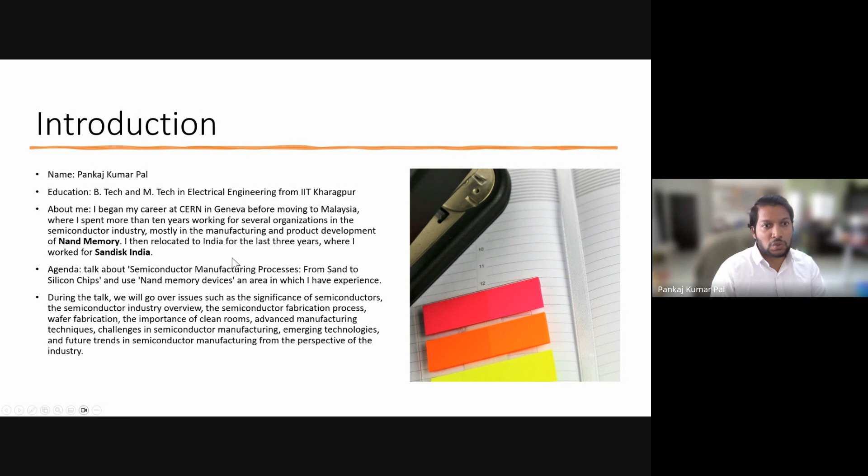Today's agenda will be to talk about semiconductor manufacturing processes, starting from the sand till we reach the product that is sold outside to the customers.

First we'll talk about market size, how it's growing, and who are the key players. As we all know, the number one market player in this field is TSMC. TSMC is a company that does the foundry job only, meaning it does fabrication only for others.

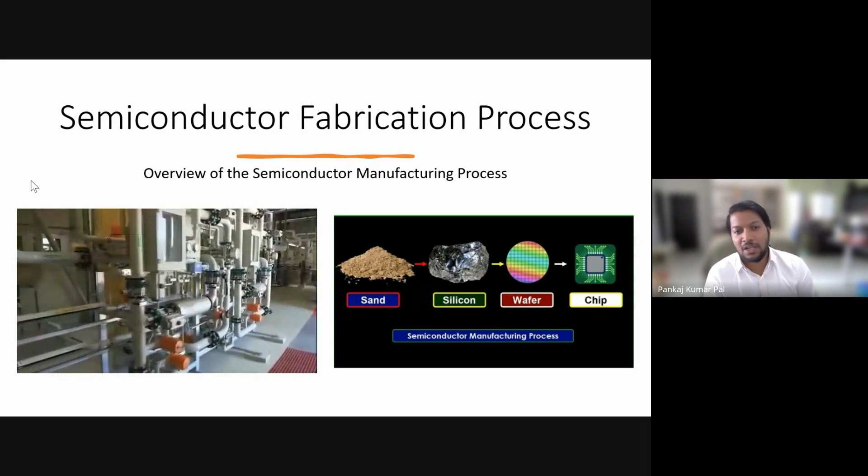So this is what we have, this is our raw material right now you see. And this raw material is everywhere, right? Like you can find sand everywhere. Sand is pretty much in every country or any place, you can find it easily. Then to build it to this chip level, it goes through complex factories and foundries where we take the sand and then convert it to these chunks of silicon you are seeing right now. So this will be building from it, and then we will heat it like in a furnace and have a crystal ingot, and then this kind of cylindrical metal that you are seeing, that is pure silicon which has to be chopped into wafers later on, and from there onwards we will make these chips.

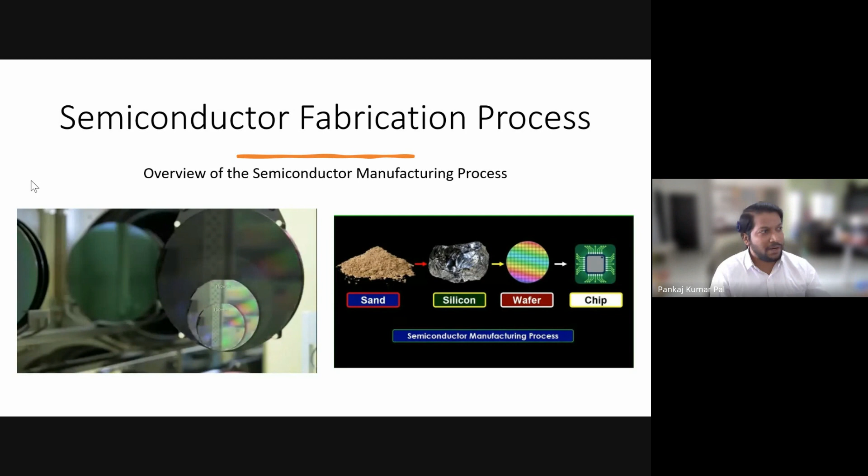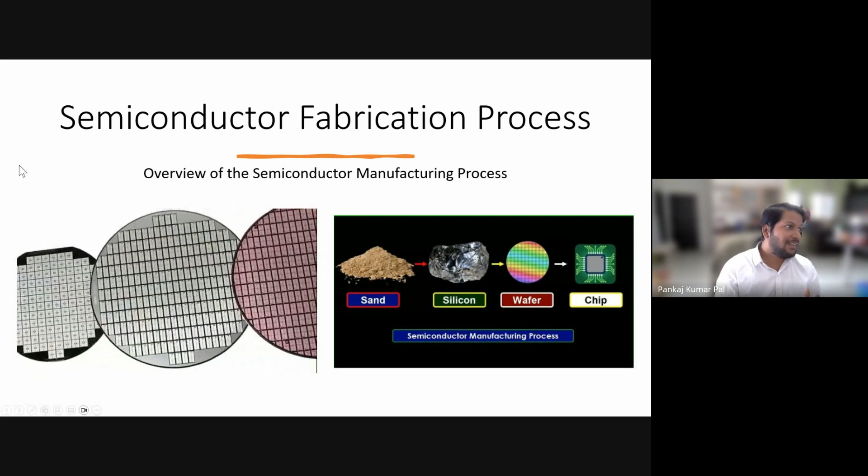So this video in short will show you all. 100 mm, 150 mm, 200 mm and 300 mm, these have been the sizes of these wafers normally used in the industry. And then within this we write the circuit in, and then this becomes small chips, what you see inside like a wafer. And within this there have been many, and now this video likes to show you how we chop this into wafers, basically these slices. So this is a basic understanding of the whole fabrication process.

But from here you can see how we make something from sand until not the chip but the wafer right now. But from here onwards we need to write circuit on it, and then we have to chop it and test it again and then make chips out of it. So we will go to the next slide.

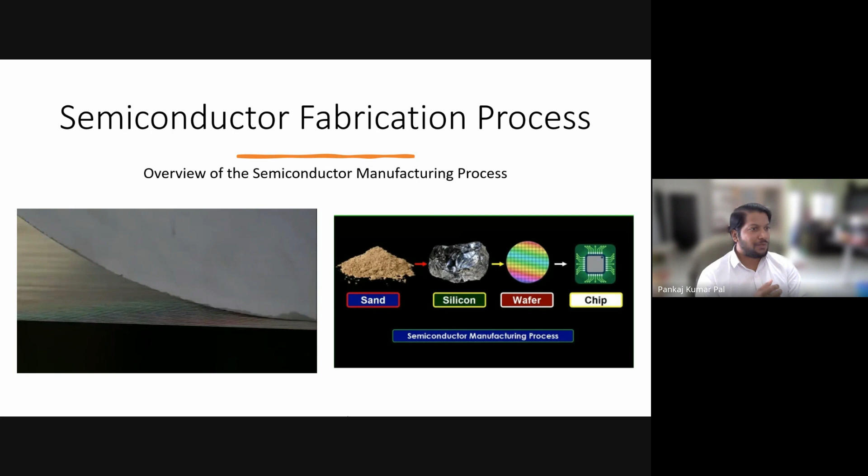Thanks to SK Siltron, because I got this video from there. So wafer fabrication needs basically sand, and then we have to do the crystal growth, and we have to cut the wafers in, right? So this process is pretty complex.

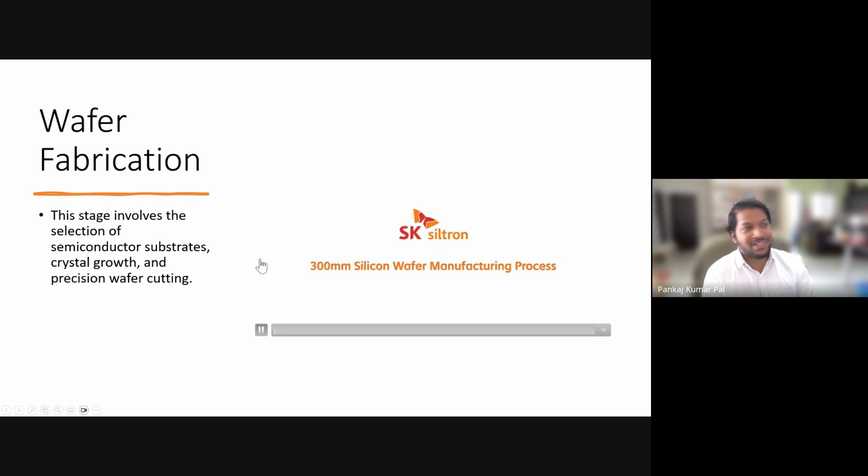It is not as easy as it seems. Let me play this video and everybody should watch it, please.

Polysilicon stacking is a process of filling polycrystalline silicon, the raw material for silicon wafers for semiconductors, into a quartz crucible.

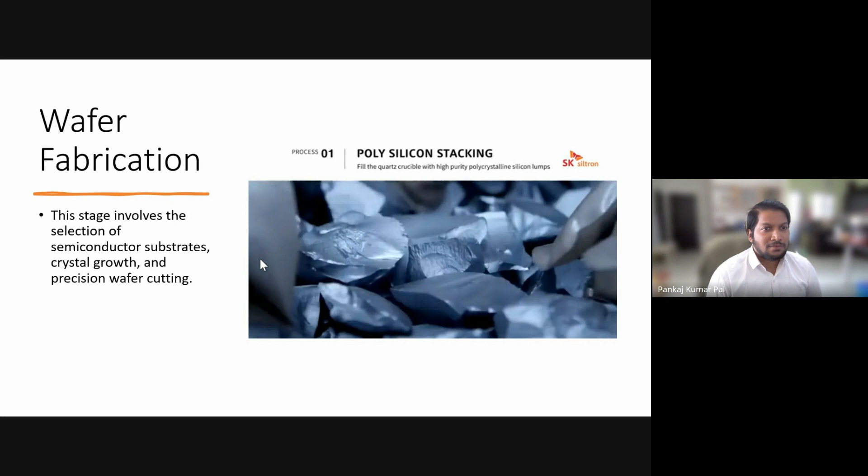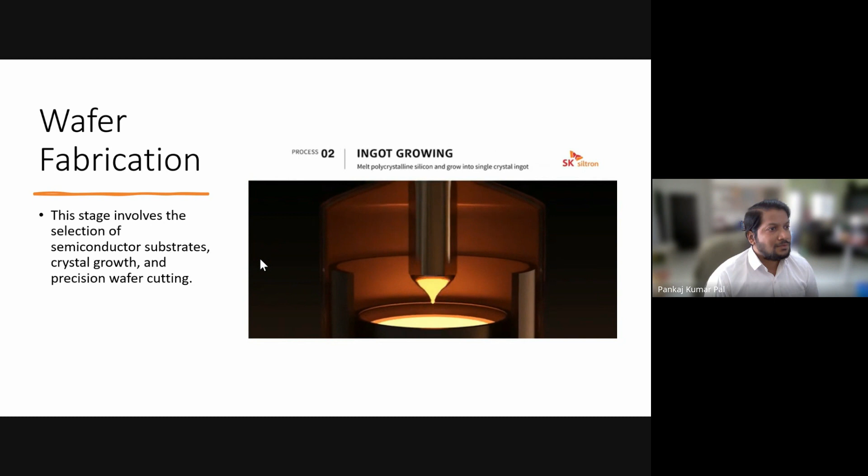Ingot growing is a process of transforming polycrystalline silicon into monocrystalline silicon, melting polycrystalline silicon into a liquid, and precisely controlling the thermal environment, growing it into a high-quality single crystal ingot.

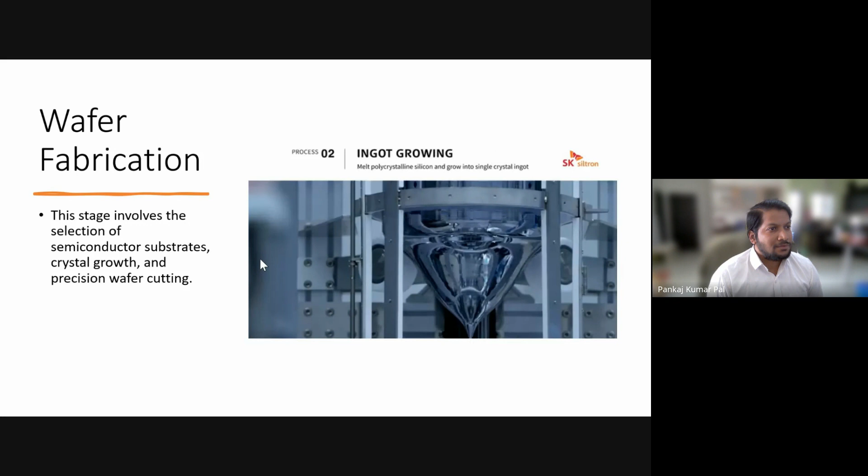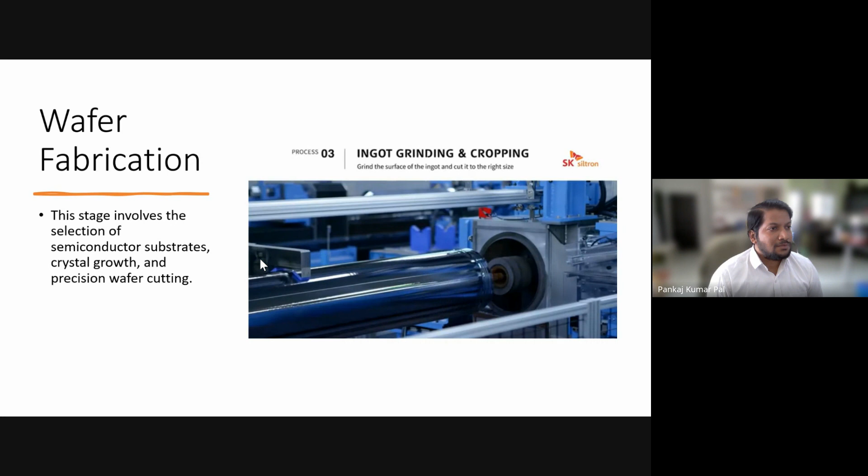Ingot grinding and ingot cropping are processes in which the ingot surface is trimmed and then cut into blocks to accommodate subsequent machining.

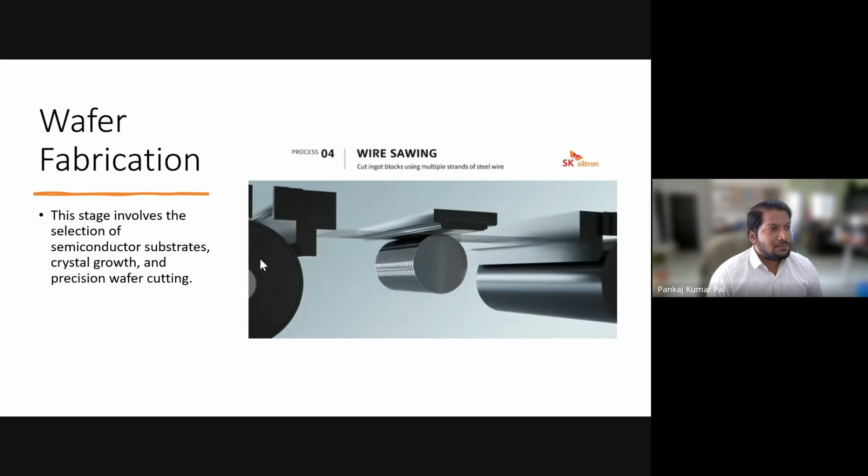Wire sawing is a process that turns ingot blocks into multiple sheets of wafer by vibrating thin steel wires at a high speed to cut the ingots in thin slices.

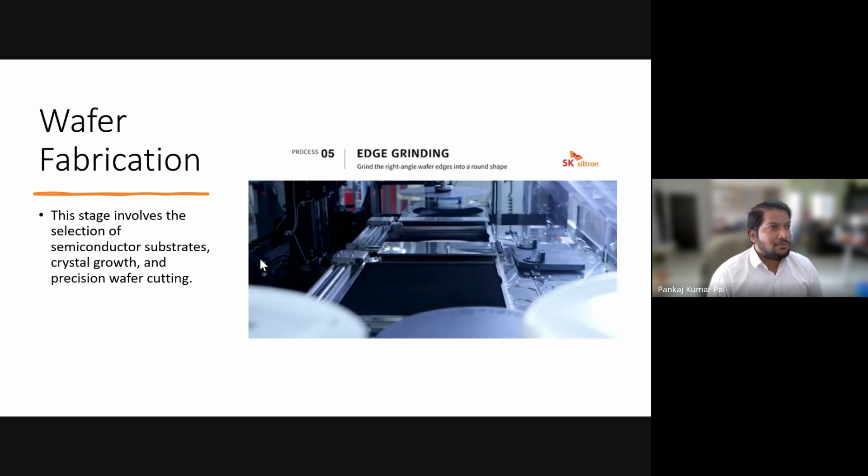Edge grinding is a process that reduces the risk of breakage due to external impact by rounding the edges of the wafer.

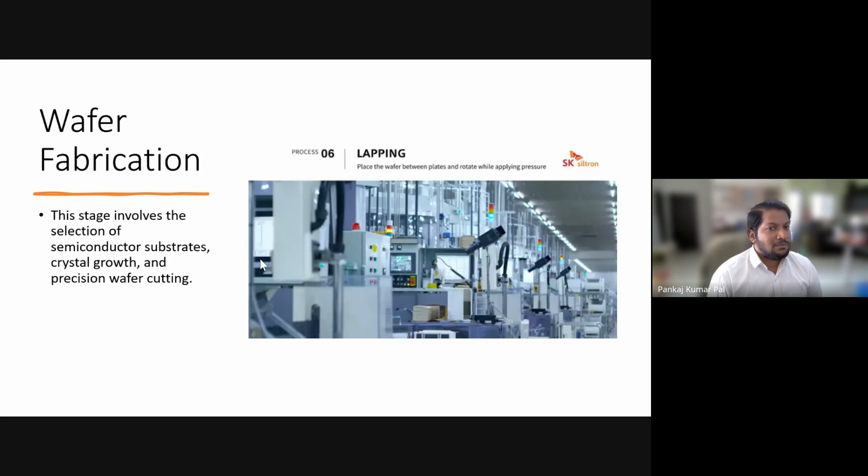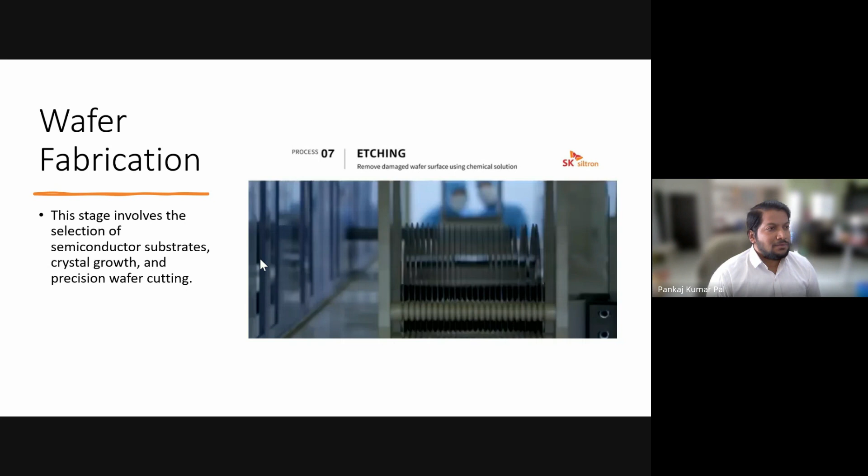Etching is a process that dissolves and removes any physical damage on the surface layer of the wafer sustained during the manufacturing process using a chemical solution.

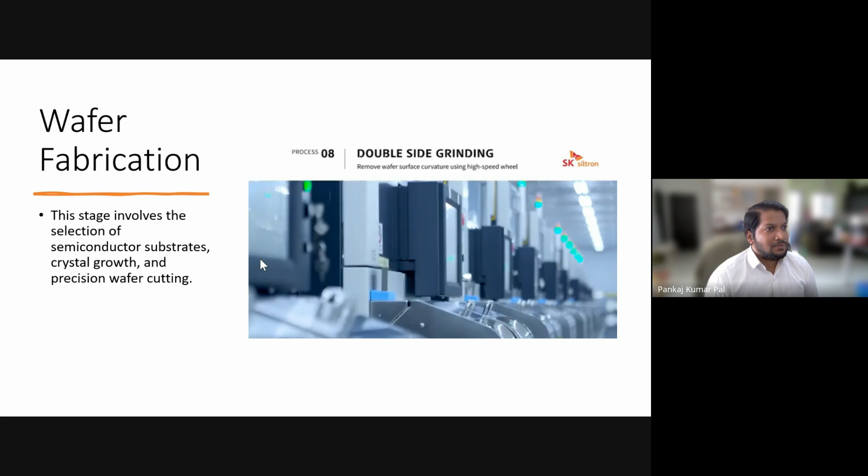Double-side grinding is a process that makes the wafer flatter and removes small curves on the wafer surface.

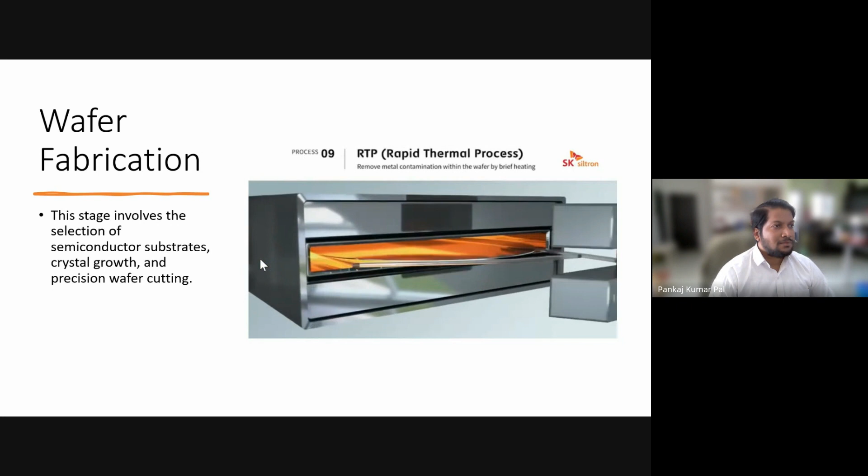RTP is a process that rapidly heats the wafer within a few seconds, which makes the point defects inside the wafer uniform and suppresses metal impurities to prevent abnormal operation of semiconductors.

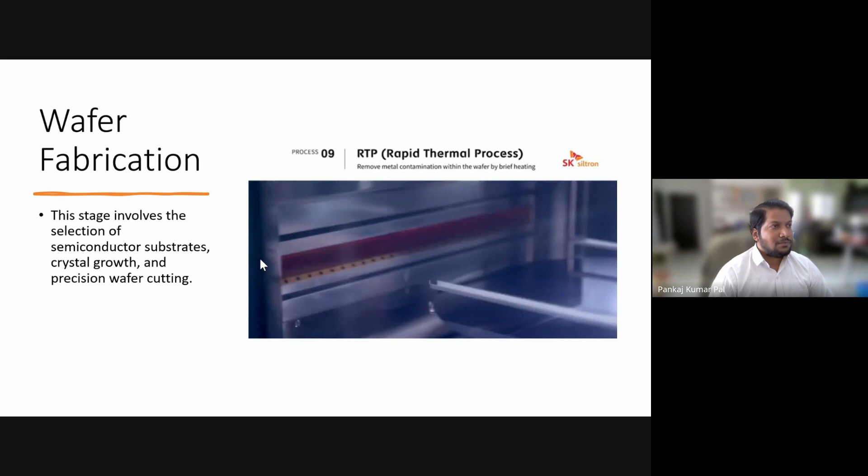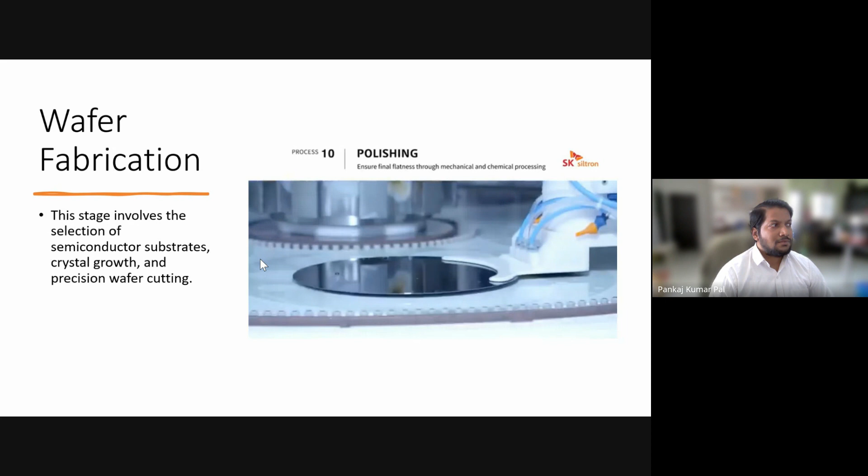Polishing is the final step for securing the flatness of the wafer through surface precision machining. It simultaneously eliminates microbending of the wafer surface by performing both chemical and mechanical machining using abrasives.

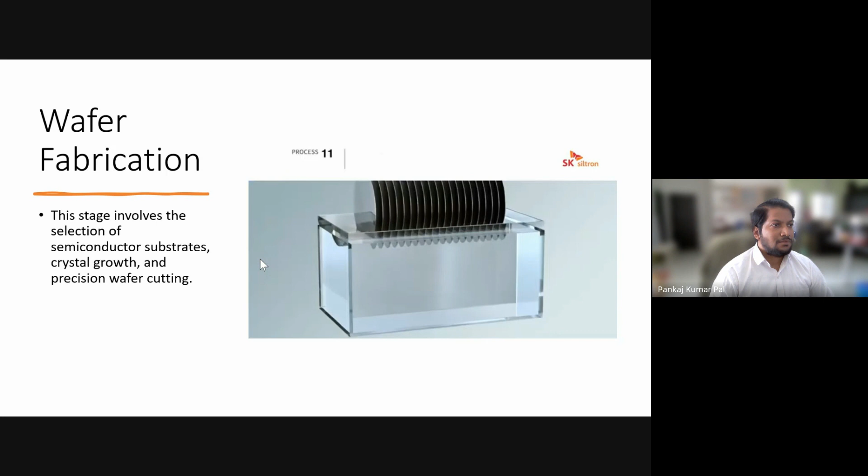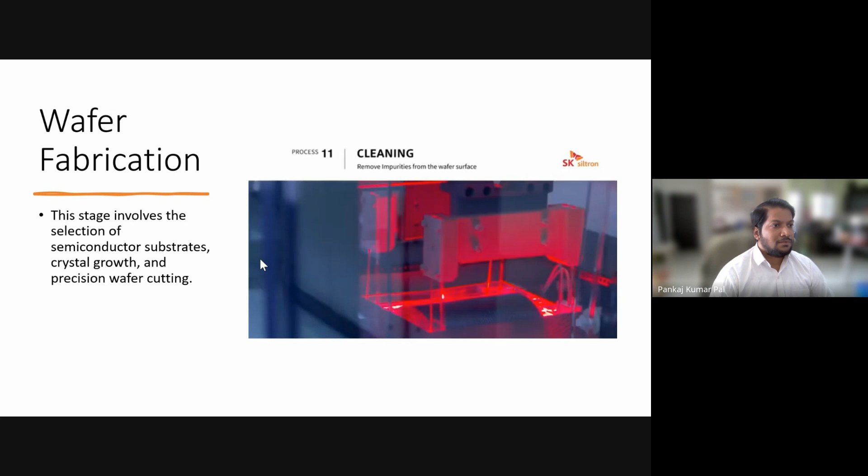Cleaning is a process that increases the cleanliness of the wafer by removing byproducts and airborne particles from previous processes with chemical solutions.

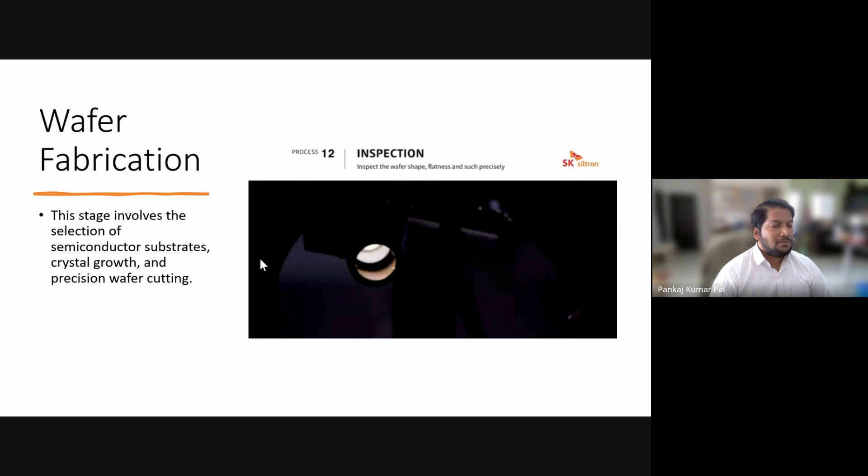Inspection is a process that measures fine details and product quality using a variety of equipment to ensure wafer flatness, shape, and so forth.

Particle counting is a process of precisely inspecting the surface of a wafer, measuring the size and number of surface defects by laser scattering.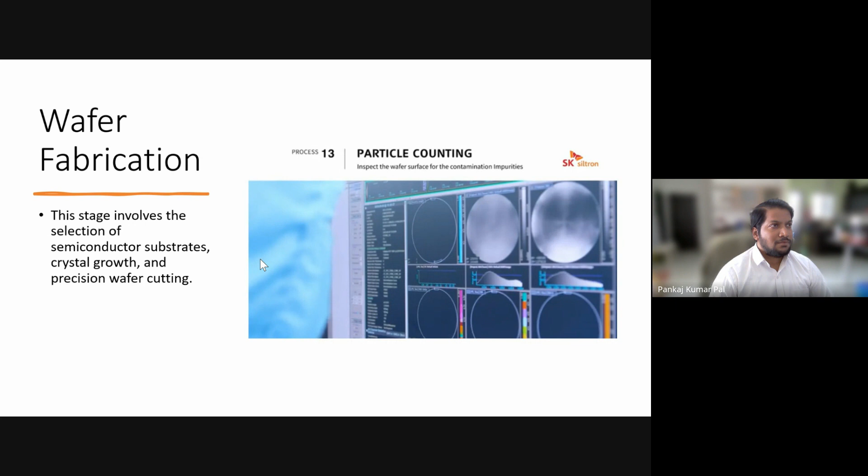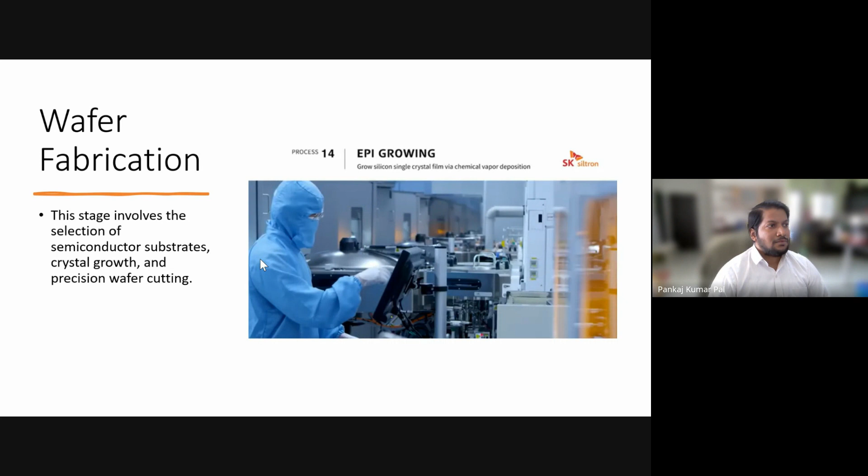Epi-growing is a process of growing a high-quality silicon monocrystalline film on a polished silicon wafer by chemical vapor deposition.

Final product packing protects the product from external shock, dust, and humidity.

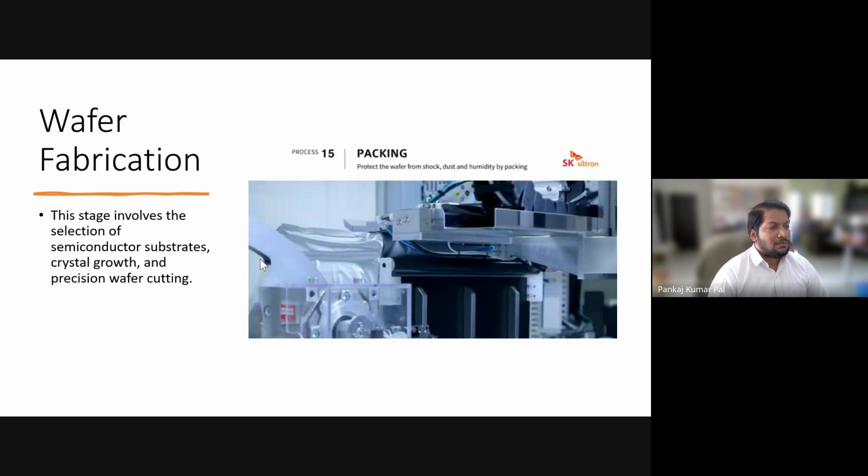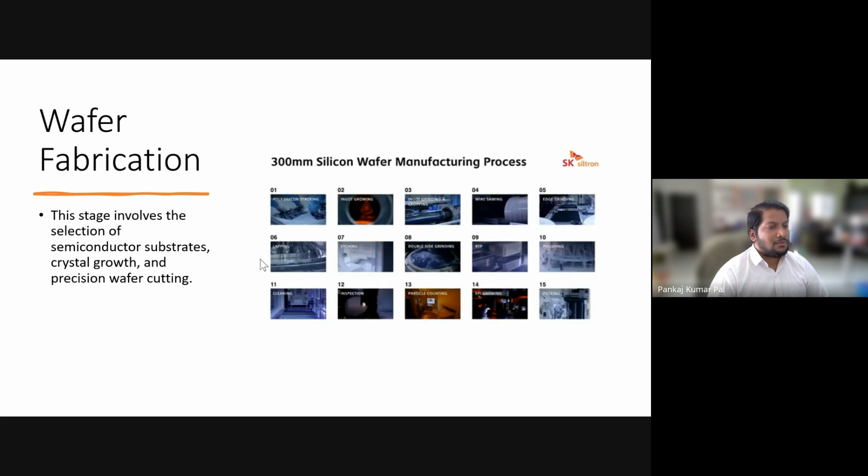Okay, so hopefully the audio was pretty clear to all of you. Can somebody confirm? Yeah, it is fine. It is fine. Yeah.

So this video, if I speak myself, however many pictures I show, it will not be so much clearer than this video. It is a small video, gives you all the process that we take from how we make proper sand till we have the wafers.

In this video, what you have seen, sand has been converted to a wafer, but the wafer doesn't have any circuits on it yet. So after wafer fabrication, it goes through multiple other things and the circuit writing is done on it. There are a few processes followed for it, and I will show you another video for a few more processes, or some pictures and some slides. So we will go to the next slide.

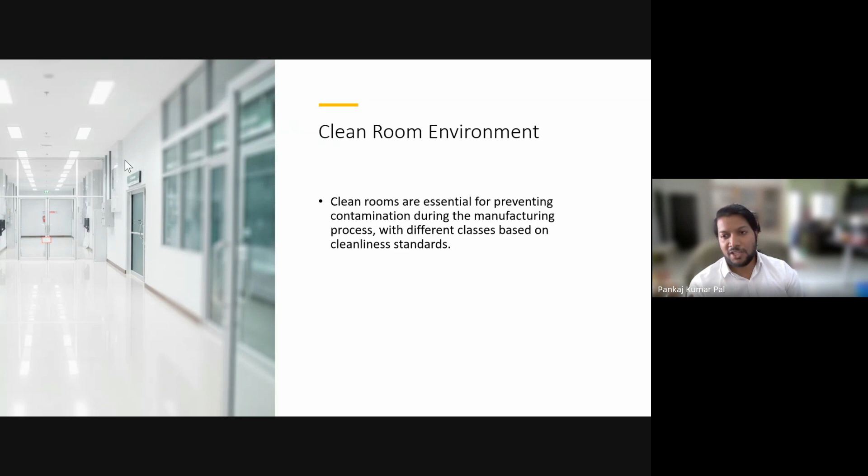Some important things like clean room environment - it is one of the most important things that we have to have, because some complexities are there in this whole fabrication, since the smallest particle of dust can ruin the whole ingot or whole process, whichever whole lot was running into it. It is a few thousand times cleaner than an operation theater of a hospital. There are some ISO standards for it that we follow. In case anyone wants to, they can go to Wikipedia and read those standards.

Because there is a mask that we make, and that mask can be bigger in size, and then you take a concave or convex kind of lens which will go down to the size of your wafer, and then it will start burning your circuits onto the surface of the wafer. That's how it works.

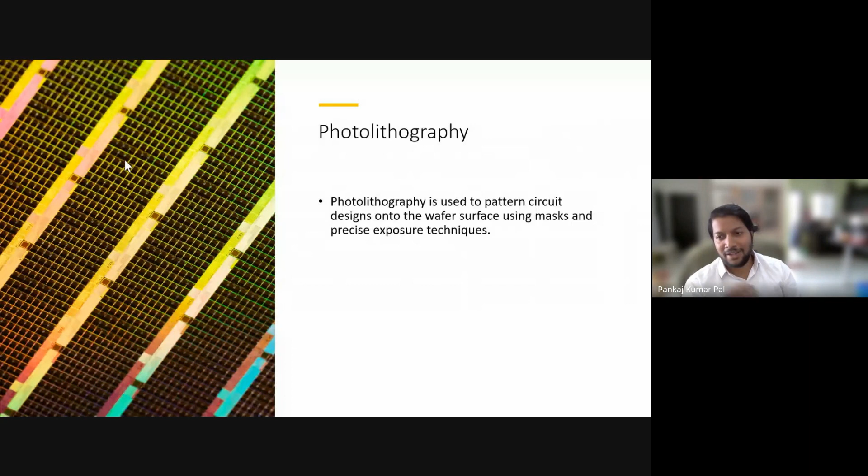So mask is one of the most important things, and people who work in the semiconductor industry know there are revisions, versions, hundreds of revisions of the mask that we go through, and each mask creates different kinds of circuits. Now, etching and thin film depositions, these are the processes that we follow for removing, writing circuits, and follow

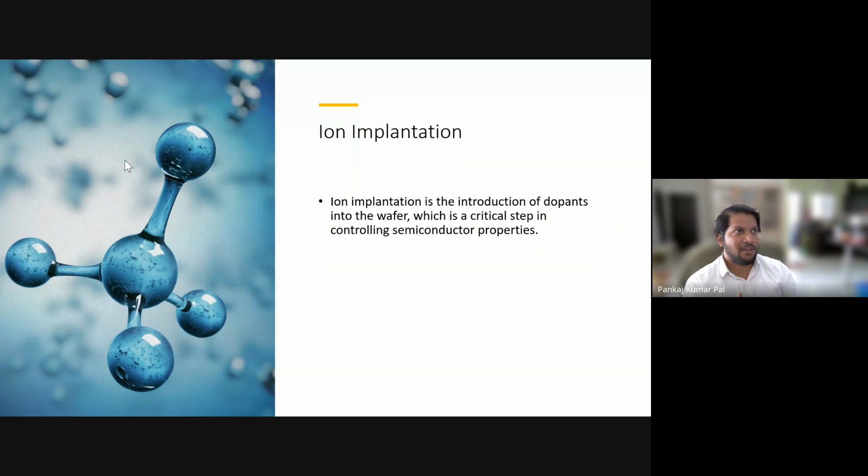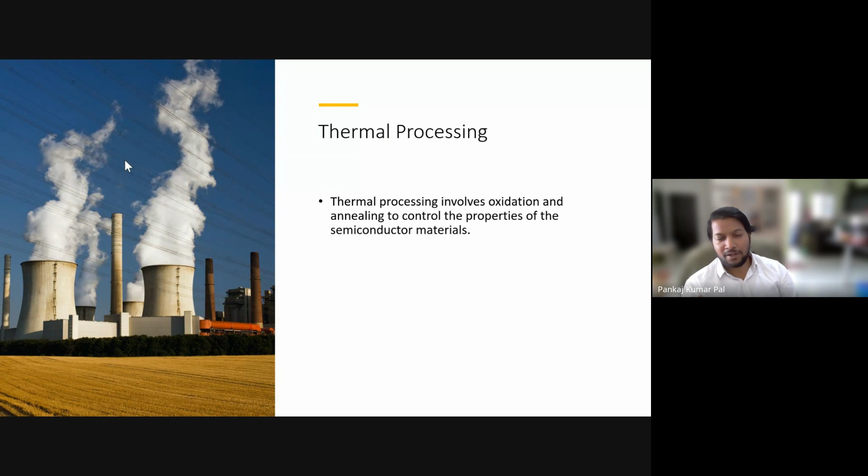on other processes, and ion implantation, that is basically for dopants into wafers, and then thermal processing, that is oxidation and annealing to control the properties of the semiconductor material itself, and the polishing process, and then other metrology and inspection, that is basically inspecting if there are any defects or not. And finally, once it's done, we do the packaging, and then at the end we test.

This is done, and I will go through a video to explain it more so that you can see it and understand. And when we talk about semiconductors, everybody talks about how many nanometers we are working in, which started from 200, 300, and the last one we know is like 5 nanometers, or maybe slightly less than that in labs. But any product that we have right now, that I know of, is 5 nanometers, at least product-based.

And these technologies have been bread and butter for many big companies. They have been embarking, like, I have this 5 nanometer technology with me, and TSMC comes with an edge for it, like they are going for 5 or 7 nanometers. And these techniques are not stopping. I mean, I can say it is stopping because there are limitations. Everyone knows we can't go below a certain number because the electronic properties of the materials will change. So we have found other ways to enhance the technology, going from 2D to 3D, that I will show later on.

Okay, so I have been in the memory industry. Memory, basically SSDs or SD cards or your pen drive, or inside your mobile phone or any kind of electronic device, you have memory. So this has been the industry where I've been working. So a basic product flow is written here right now.

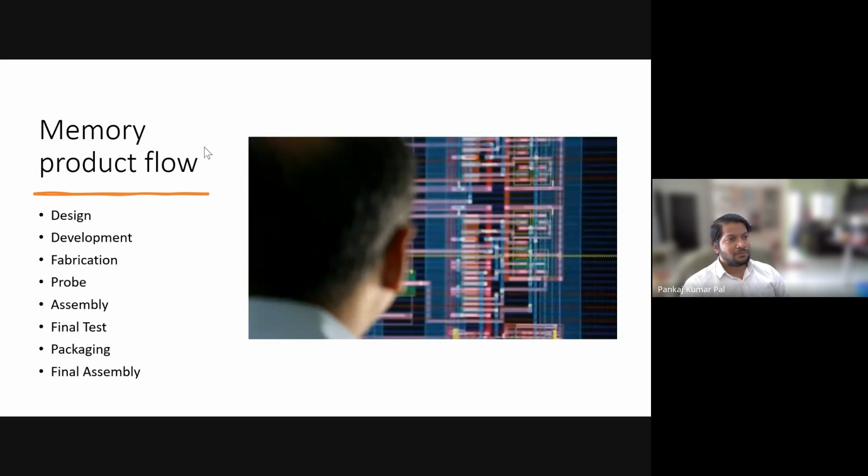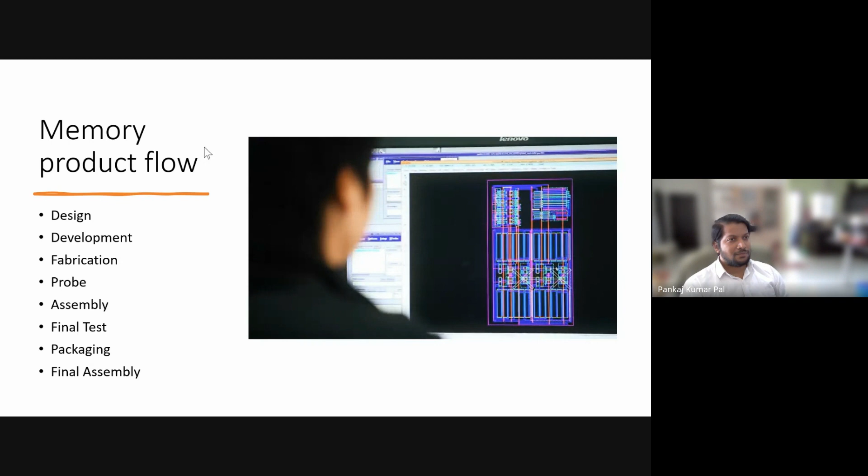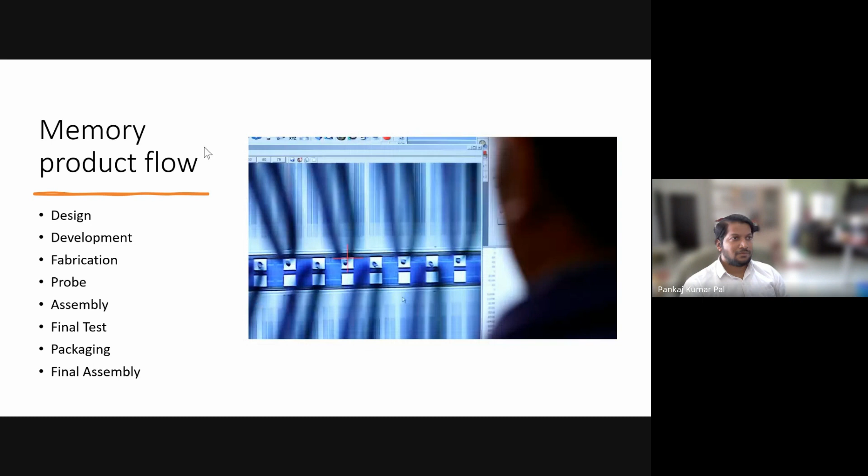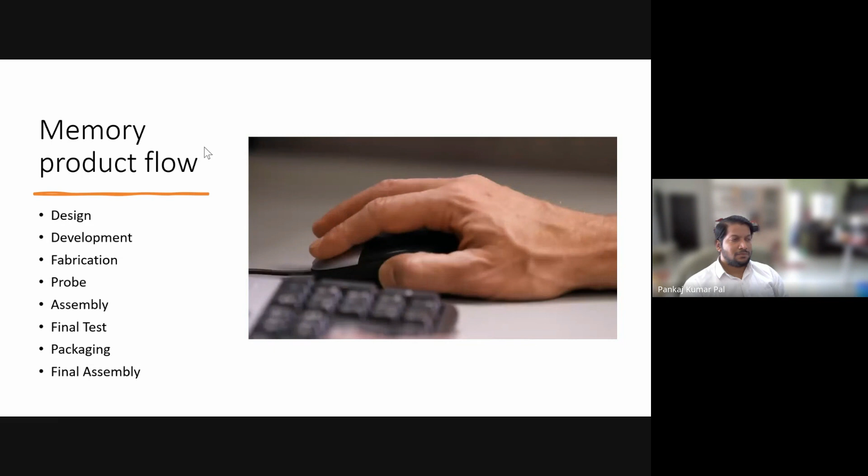Memory chip design is the first step in the production of Micron's memory chips. This process involves the use of computer-aided design tools to lay out billions of electronic components that store data on the chip according to the product design specification. During technology development, specific process steps are defined and integrated into a process flow that will build the memory chips. The process steps are tested and refined until the process node is qualified and ramped in manufacturing.

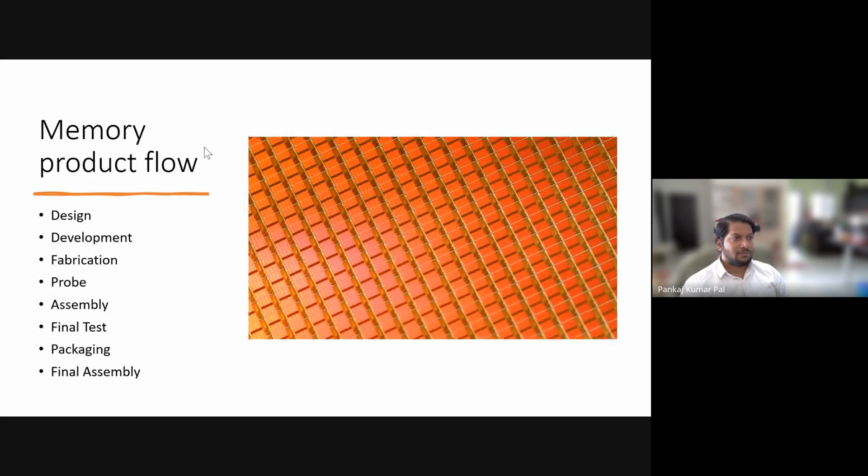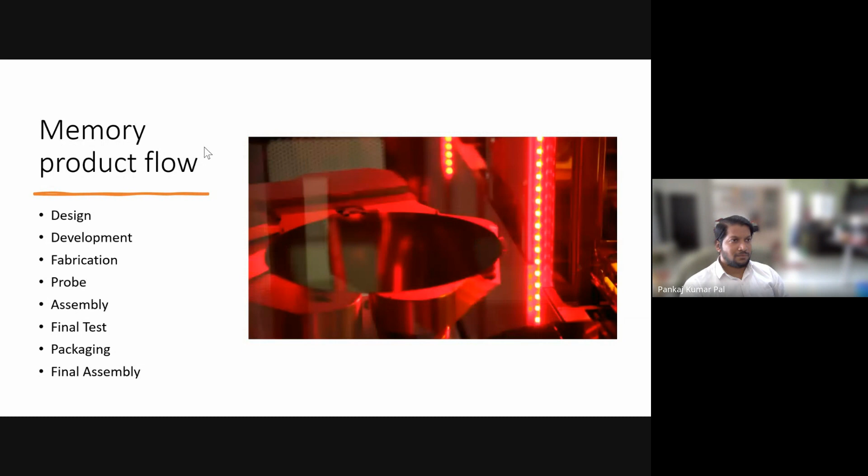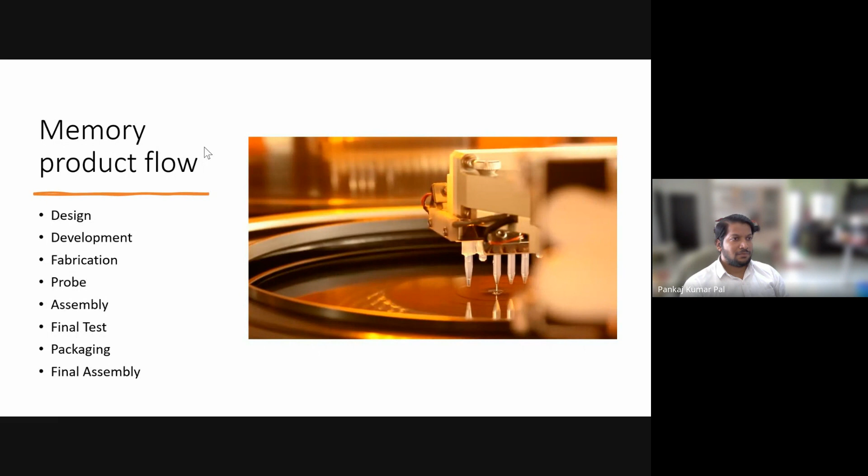Individual memory chips, or die, are built upon pure silicon wafers in a fabrication area, or fab. Fabs are state-of-the-art clean rooms that are 100 times cleaner than a hospital operating room to ensure silicon wafers are protected from ambient contamination. Among the many process areas in a fab, the photolithography area coats wafers with a photoresist material. Then, like film in a camera, circuit patterns are exposed and excess material is rinsed away. The paths in these circuits are 5,000 times narrower than a human hair.

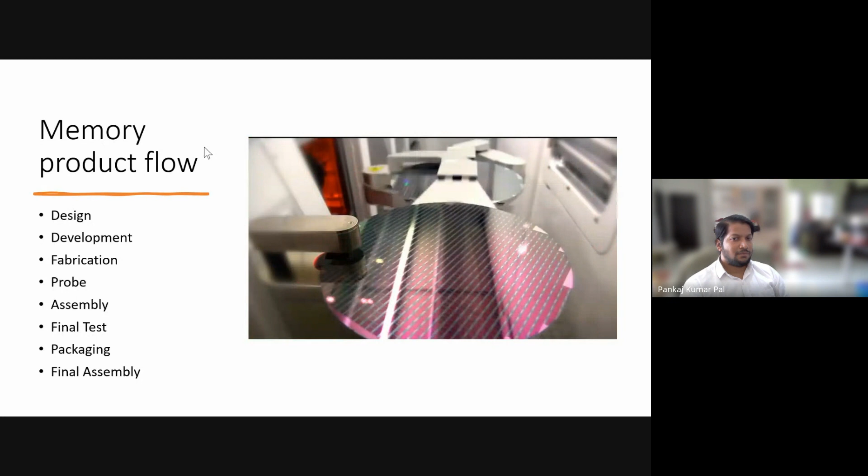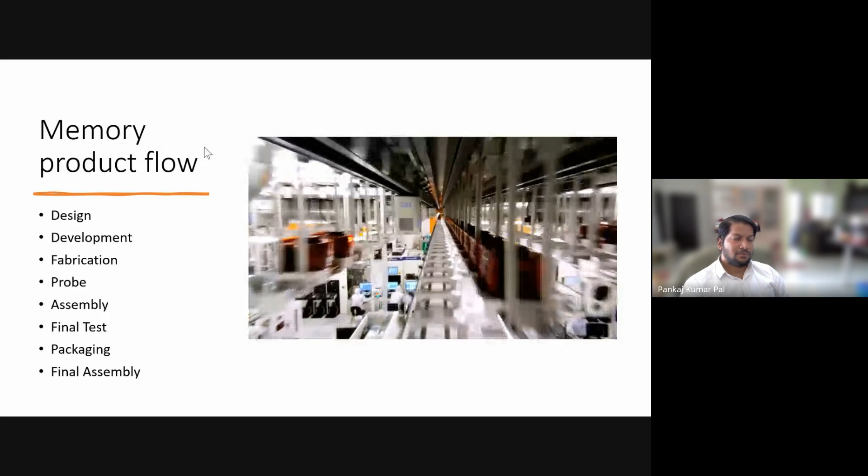Wafers are moved between different tools and processes using a robotic automated material handling system, or AMHS. Each wafer may be moved through more than 1,000 processes. It takes more than 1 month to make a memory chip.

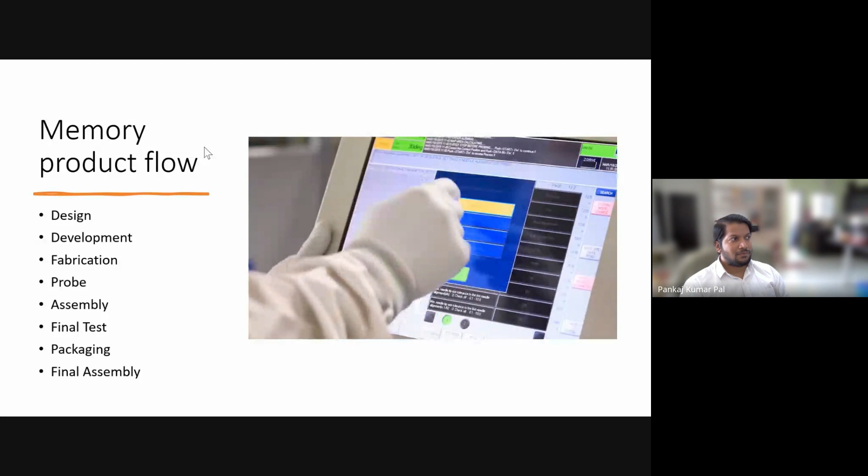In probe, initial functionality tests are performed on each die on the wafer. A probe card positions probe needles onto each die to send and receive test data. This information is used to generate a map of all the die on each wafer. Only good die that pass all tests in probe will continue through the manufacturing process.

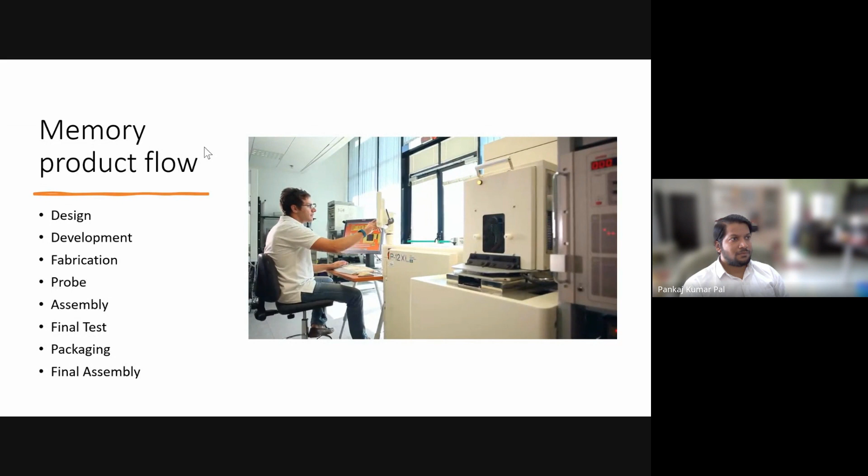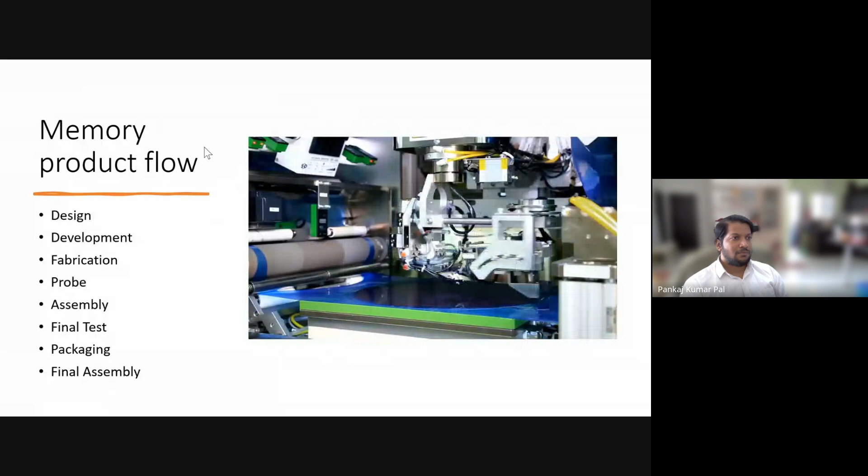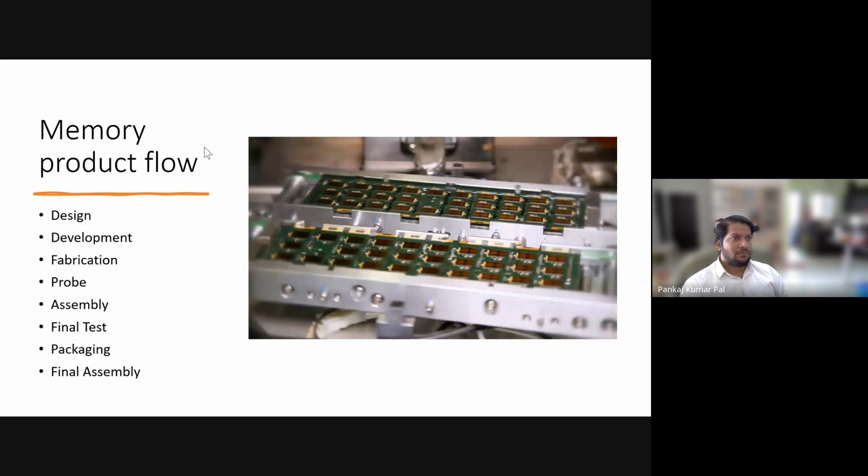In assembly, wafers are first thinned, attached to an adhesive backing, and then diced into individual die using a diamond edge saw. Using the wafer map that was created in probe, individual die are picked from the wafer, then placed on a circuit board. A solid gold wire is used to connect each chip to the circuit board. A molding process encapsulates each die in a protective plastic package and shipped to test.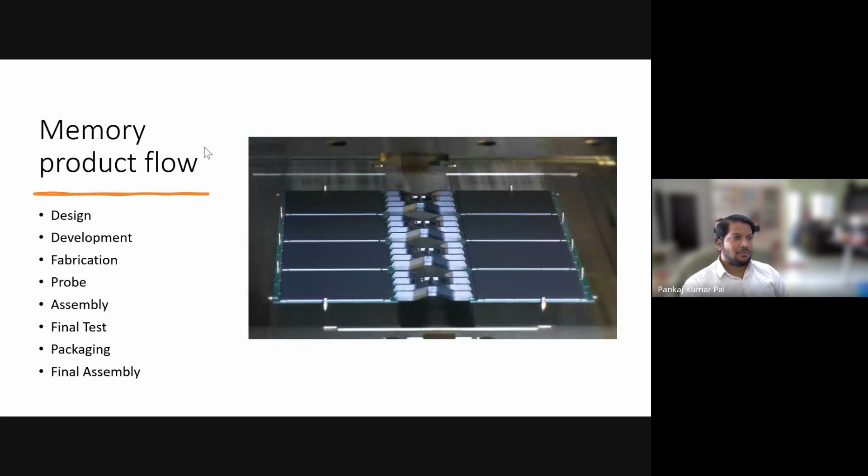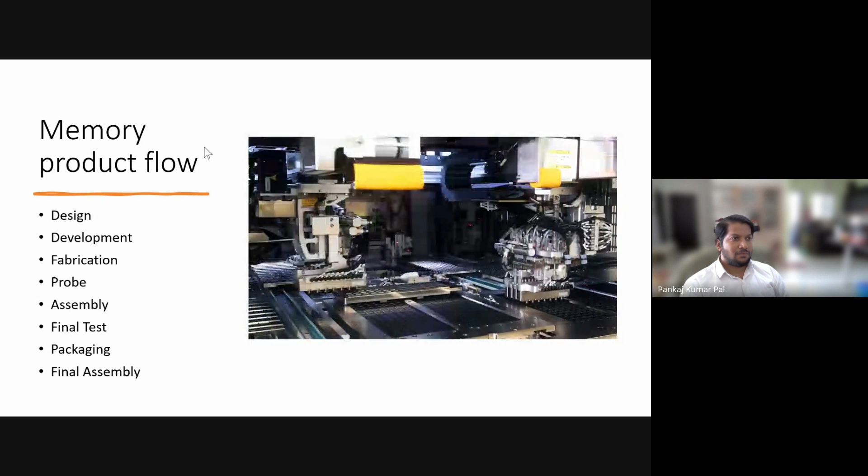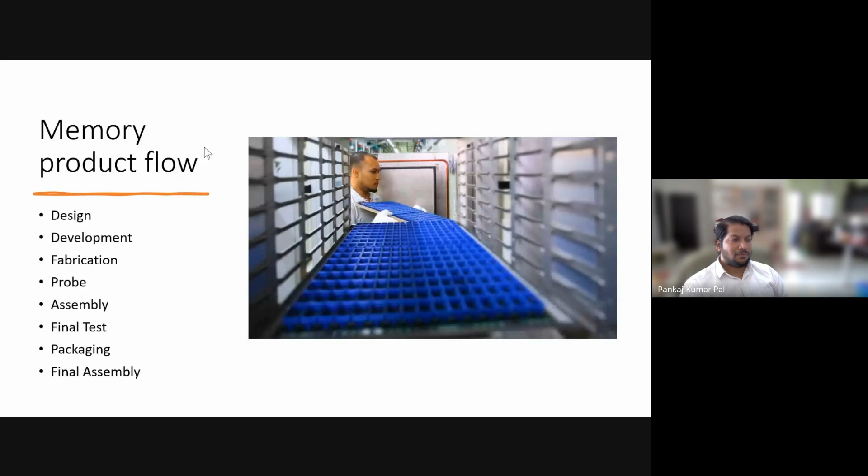Every memory chip Micron manufactures undergoes hundreds of tests to ensure it meets the highest quality standards. Proprietary Ambyx testers subject finished parts to extreme temperatures and conditions to force any weak components to fail before they reach our customers. Additional test equipment verifies that each part meets or exceeds its speed and performance specification.

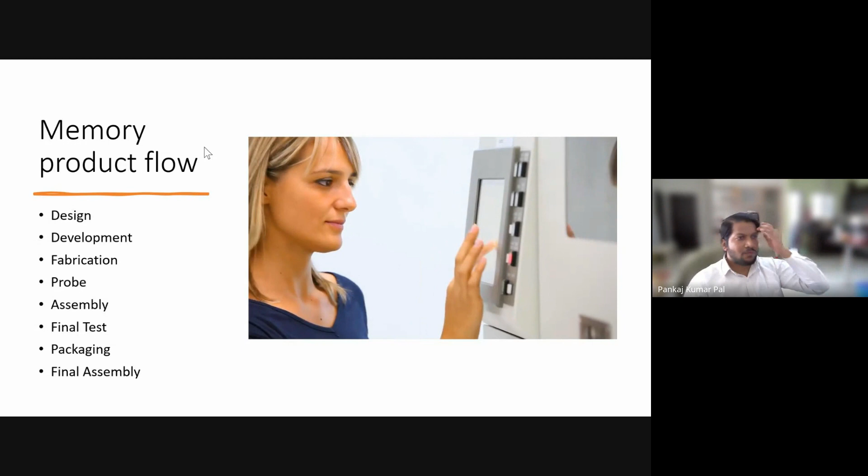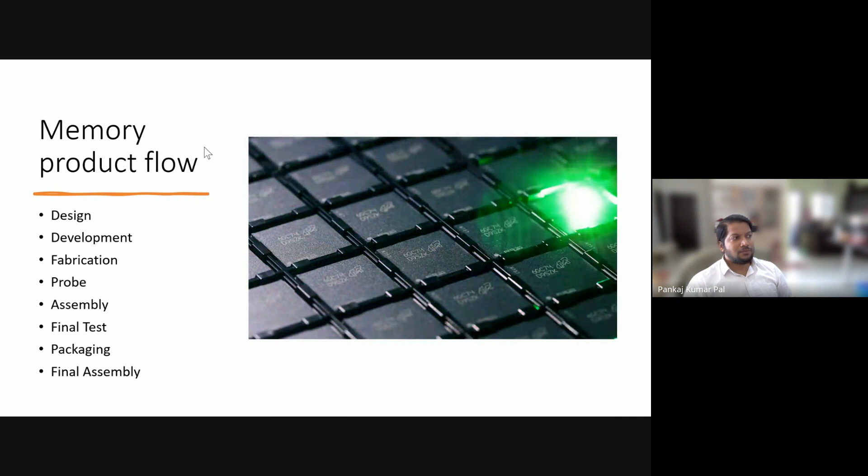All qualified parts are laser marked with part numbers and other identifying information. Each memory chip is optically scanned to verify strict fit and form specification. Components are placed into industry standard anti-static packaging and placed into boxes for shipment.

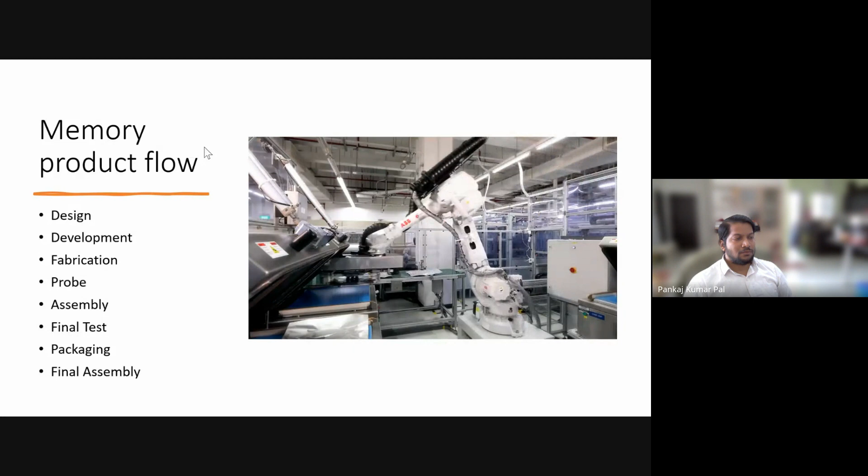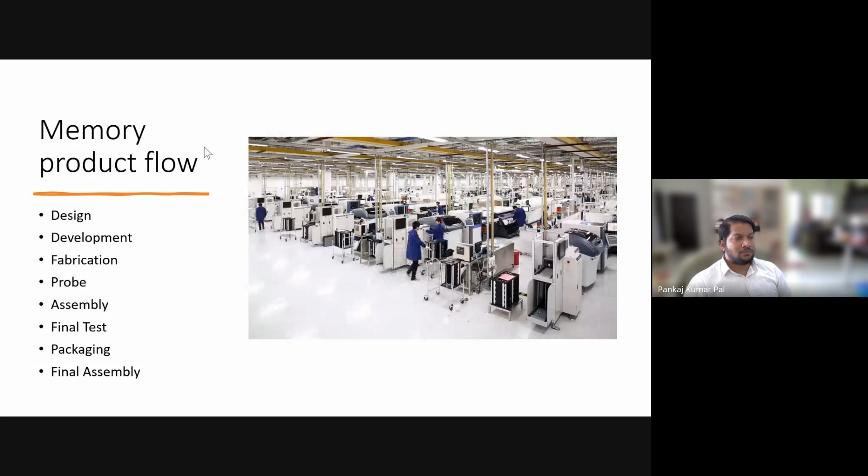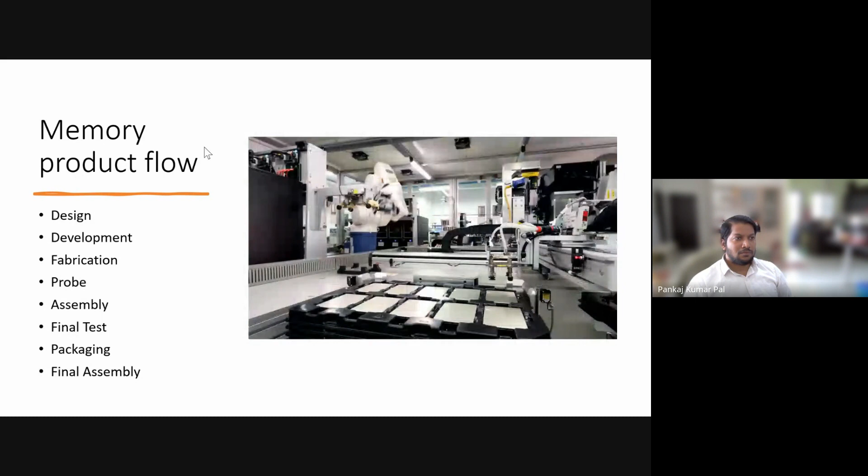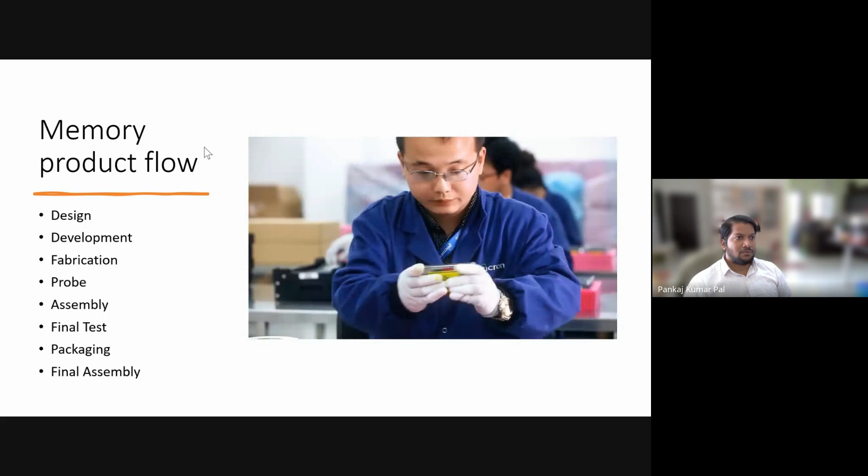Many of Micron's finished parts are used to build memory modules and solid-state drives. Automated surface mount assembly equipment is used to mount memory and other components to printed circuit boards. All products are tested using proprietary Micron memory module and SSD test equipment. Finished products are placed into anti-static packaging before boxing for shipment to the customer.

Okay, so this is a basic overall overview of the flow, where it has shown you from the start till the SSD we make. This is the whole memory process, and we'll go to the next slide. So in this, one of the most important things is definitely fabrication, and the next turns out to be testing. If you paid some attention, there are 3 types of testing. One which you heard as probe. So in how many forms have we seen the product yet? At least 3 forms, if you remember.

First is wafers. So wafers are the product itself, because wafers can be directly sold, or wafers can be bought from some vendor, or within a company there can be a separate factory which is sending them to the other factory. So the first product you can say is wafer level, and next is component level, which is basically BGA format. It can be in other formats also. This is a packaging methodology. For example, BGA is the most preferred. And the third one is system level.

System is nothing but, once you use these small BGAs or components, you will put like 10-20 of them and build a system out of it. Then it comes to system level. This is, in terms of memory, how it looks in the 3 levels which I have divided. But if you see any other product, it will come the same way. It will first have the wafers, which have to go through the whole testing flow. Next will be the component, which again goes through testing, and the third one, system, again testing.

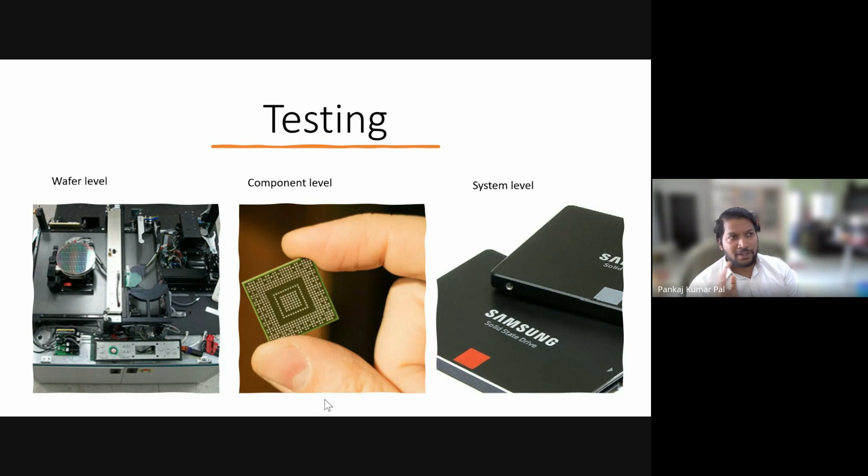It's not feasible to make a product less than 5 nanometer, or maybe 1 or some level. I don't want to debate on that, but definitely there is a certain level which we have been reaching in the last 10 years, beyond which we can't make properly working circuitry. Moore's law has mostly been based on technology nodes: 200 nanometer reduced to 50, then 30, 22, 10, then 8 nanometer. Each node kept following Moore's law.

Then at 5 nanometer, the industry asked how it will follow anymore. So now the strategy has changed. Previously we have been working in 2D. 2D is like your own one-story house, you keep building in one area. Then we came out with more solutions, which is putting it into 3D. 3D is a simple idea: why are we making houses? Why don't we just build tall skyscrapers, 10-story, 20-story, or 200-story buildings? That way, within the same wafer, we will make a lot of it.

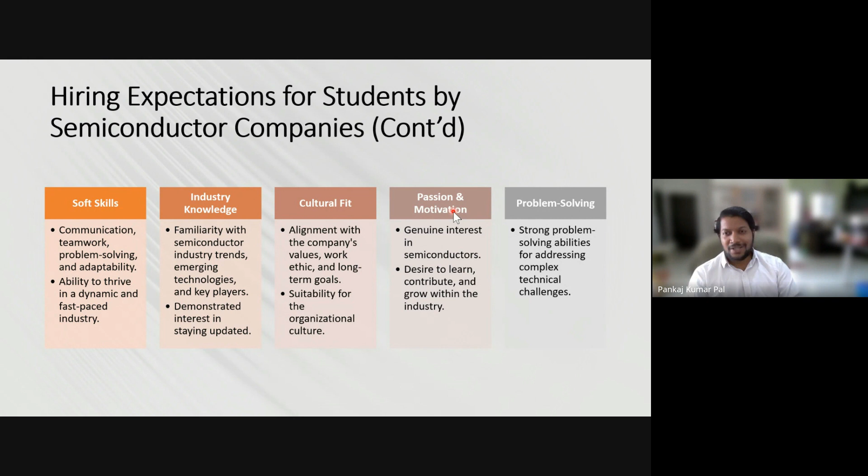And then problem solving, I think every job needs it, so it's there. So these are the things required. Hopefully all of you will have it. And that comes to the conclusion. The semiconductor industry has been around pretty long. It is not today's work, right? It has been since the 50s or 60s, since Moore gave Moore's law, and for 20, 30, 40 years it has been growing rapidly. And the last 10 years have been even more amazing.

There have been chip wars, there has been a chip shortage, and then there have been downfalls also. So this industry has gone through a lot of ups and downs. Mostly it has been a booming industry, and in the coming future, at least from India's perspective, a lot of things will definitely be coming to semiconductors, because the current government shows a lot of interest in semiconductors, and we know there is no proper wafer fab in India, and right now the government at least wants it, right?

Only countries like Japan, Taiwan, the US have wafer fabs. Very few places have them, and a wafer fab is a very huge investment. So it has to be supported at a country or government level. And not only that, it has to overcome a lot of technical challenges. Even China wants to compete in that, but isn't able to, right? So there are a lot of ups and downs, a lot of geopolitics, but India at least seems to have a good future in these terms. So this will be it.

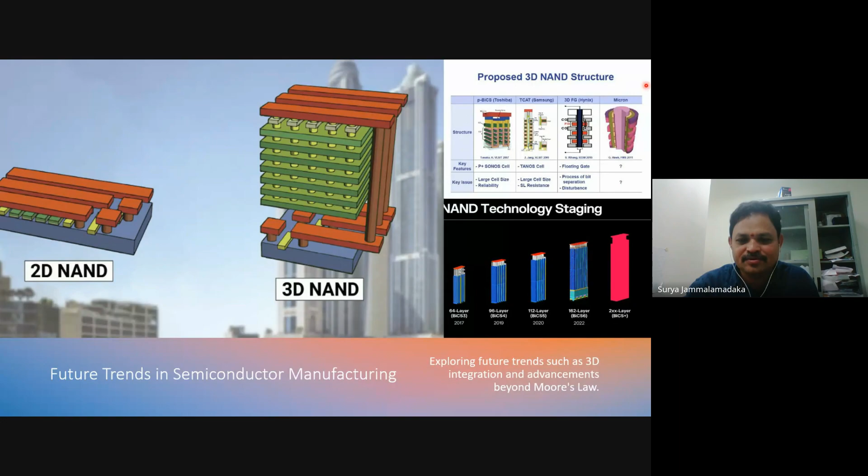So if there are no more questions, let's thank the speaker, Mr. Pankaj, for his wonderful lecture. I think his insights will be very useful for all of us in terms of technology development, particularly the transition from 2D NAND to 3D NAND. He also discussed the insights of 3D NAND, like what its limits are and what its capability is. So thank you once again, Mr. Pankaj, for your wonderful lecture.